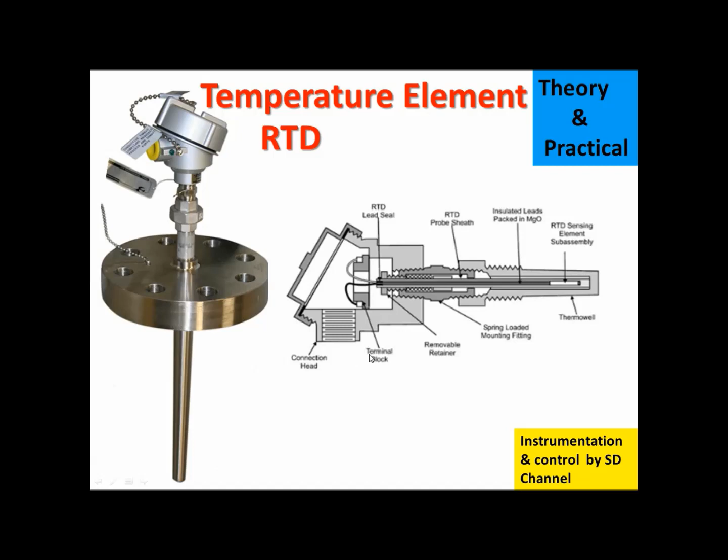So, what is the principle of RTD? RTD stands for resistance temperature detectors. It operates on the principle that the resistance of a metal changes with the temperature, means if the temperature increases, resistance will increase, and if the temperature decreases, resistance will decrease. So this is called positive temperature coefficient. RTD is a positive temperature coefficient.

So you can see here how a typical RTD looks in industry. So this is the element, and this is the terminal part. This is the cable gland, and this is the cross sectional view of the RTD. Here a RTD bulb is there, and this is a two-wire RTD. So two wires are shown here.

You can see if you give the temperature here, the resistance of the RTD bulb will increase, and that resistance is converted by the controller into the electrical signal, that is heat to resistance, resistance again to temperature.

So now the question is why platinum wire is used in RTD. You may know already that platinum wire is used for the RTD purpose. Why? Platinum has an excellent corrosion resistance. It can withstand chemicals and has excellent long-term stability. Over the period of time, it shows the perfect characteristic. So no deterioration will be found in the long term.

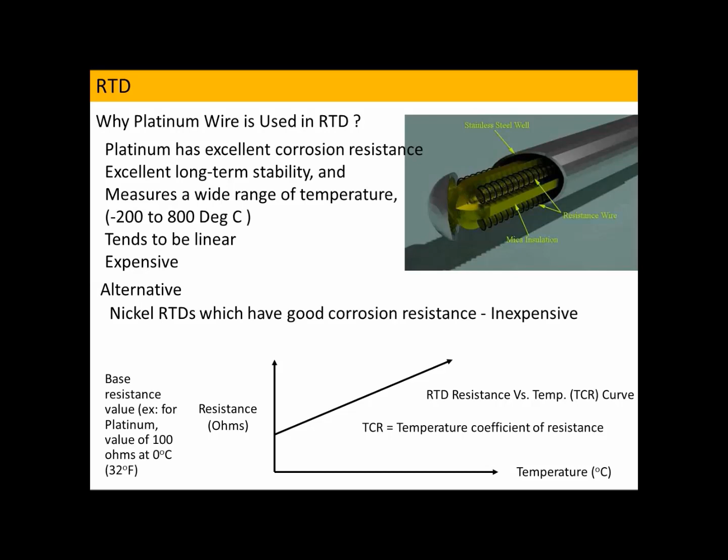Now you can see the loop of the RTD, how it is connected with the DCS. I have shown here the two possibilities how it is connected to the DCS. So this is your RTD. This is the terminal. You can see three wires are there. This is a three-wire RTD. One is white, the other two are red. These two red wires are internally connected.

So the resistance between these two lead wires will be less than 1 ohm, and you can see this white wire. This white wire is connected to the RTD resistance. So you will get some resistance according to the temperature in between the red and white. So this depends on the temperature.

So now this RTD is connected through this line. You follow this line, connected to the DCS directly. So the resistance is going to the DCS. Now there is another option. RTD can be connected to the temperature transmitter, and this temperature transmitter converts the resistance to 4 to 20 milliamps.

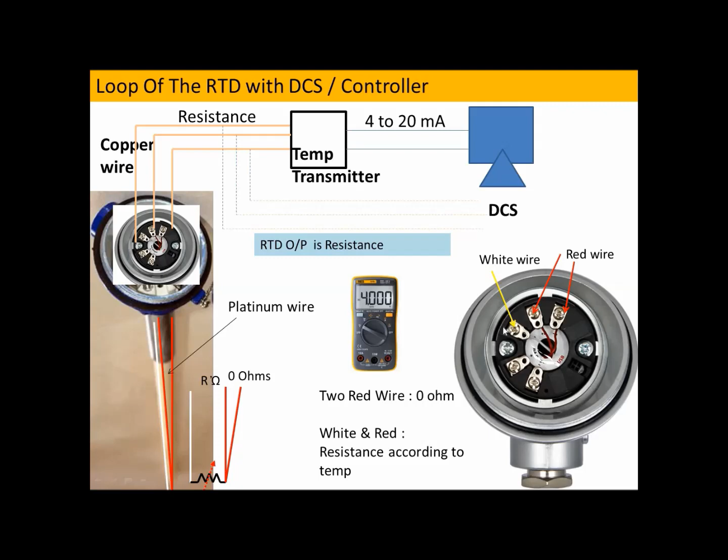So now what is PT100 and PT1000? These are the two types of RTD generally used in industry. One is PT100. PT100 means at 0 degree C temperature, the RTD will give you 100 ohms resistance. And PT1000 means at 0 degree C, the RTD will give you 1000 ohms.

So around 10 times. Now see, for both PT100 and PT1000 sensors, linearity of the characteristic curve, operating temperature range, and response time are all the same. The temperature coefficient of the RTD is also the same for both PT100 and PT1000.

But the difference is that suppose for PT100 the measurement error is plus 1 degree C. For the PT1000 it will become 0.1 degree C. This was 1 degree C, this is 0.1 degree C, because PT1000 is 10 times more than PT100, higher by the factor. So this will reduce the error by 10. So the PT1000 is more accurate than the PT100.

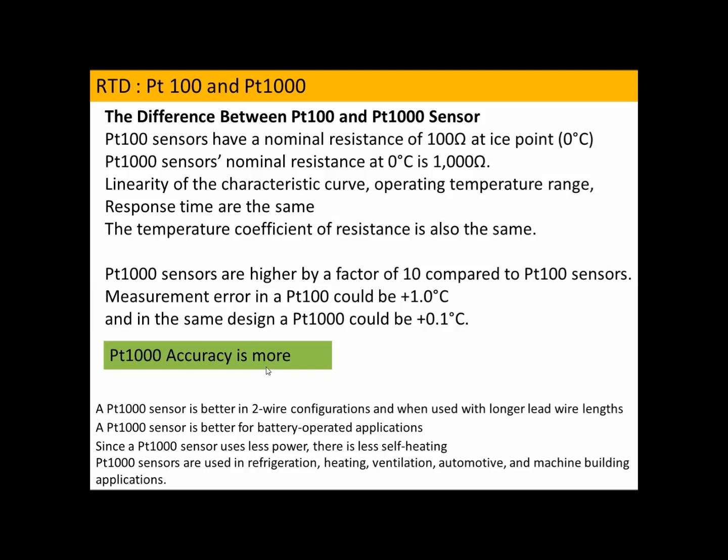So now, what is the temperature coefficient of resistance? To convert the resistance into temperature, there is a formula. For that, you have to know what the temperature coefficient of resistance is. That is denoted by alpha. Alpha is equal to resistance at 100 degree C minus resistance at 0 degree C. For PT100, resistance at 0 degree C is 100 ohms. And divide by resistance at 0 degree C, that is 100 ohms, into 100. So this is the formula.

Now you can see there are two types of temperature coefficient. One is the older US standard, that is 0.00392, and the newer European standard, that is 0.00385. In our industry practice, we usually use the temperature coefficient 0.00385. Both are applicable for PT100 and PT1000. Same.

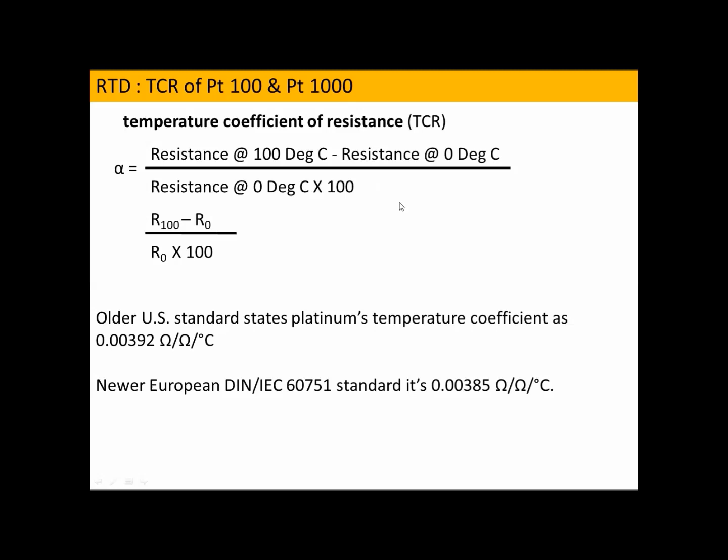So for RTD, I'll show you the lead wire effect. Now consider this is a two-wire RTD. Ignore this resistance now. This is connected directly to the RTD, and the resistance of the RTD you get is 177 ohms. Now we will calculate the temperature for 177 ohms. I have shown you the formula. R, 177 ohms, divided by resistance at 0 degree C, that is 100 for PT100, minus 1, divided by temperature coefficient 0.00385, that will be 200 degree C. So for 177 ohms, the temperature is 200 degree C.

Now consider due to the length of the RTD lead, this lead resistance is increased by 5 ohms, and the resistance of this lead is also 5 ohms. So now these 5 ohms, these 177 ohms, and these 5 ohms are all in series. So the equivalent resistance of the RTD will be 177 plus 5 plus 5, that is 187, divided by resistance at 0 degree C, that is 100 ohms, minus 1, divided by alpha, the temperature coefficient 0.00385, that will be 225.974. So the actual temperature is 200 degree C, but due to the lead wire, it is showing 225.974 degree C. So 25.974 degrees more. This is an error. This is called the lead wire effect.

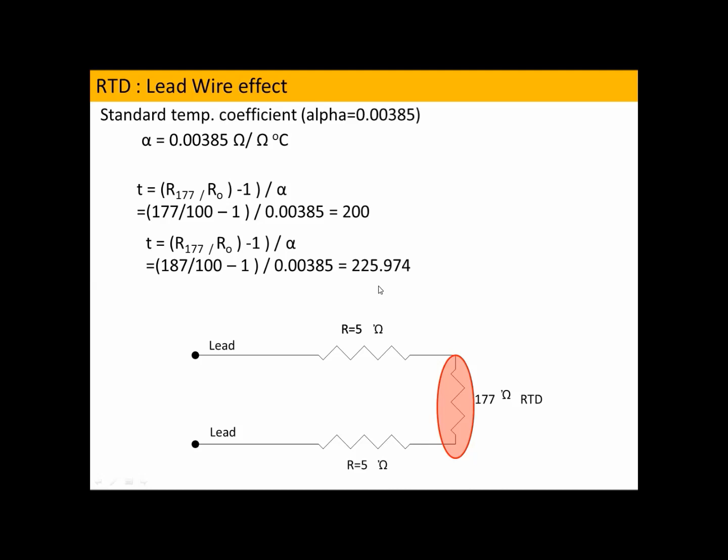So according to leads, there are mainly three types of RTD: two-wire, three-wire, and four-wire RTD. Two-wire RTD has no lead wire compensation; it's directly connected to the RTD. For three-wire RTD, there are three leads: two main leads, and the third lead is for compensation. For four-wire RTD, there are two main leads and these are the compensation leads. So four-wire is more accurate because each lead has one compensation lead. So this is more accurate.

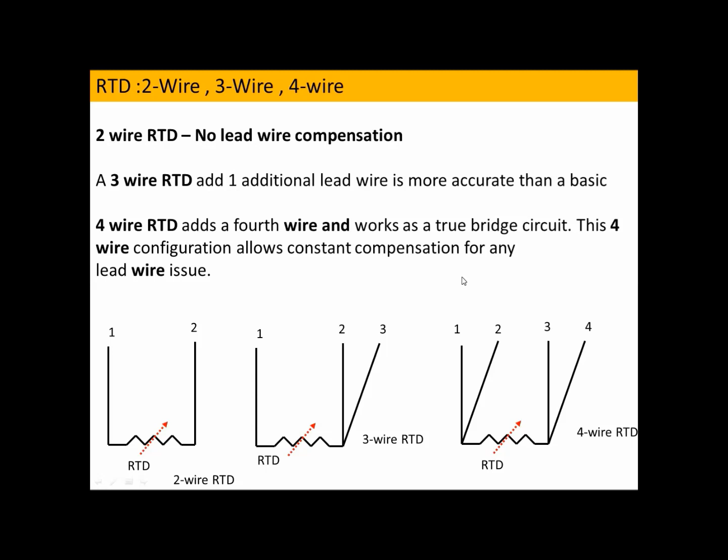So identification: how you can identify the RTD leads. These are the main leads, for example 1 and 3, 2 and 3 also. You will get resistance between 1 and 3, 2 and 3, or 2 and 4 around 107 to 110 ohms, because our ambient temperature is around 30 to 37 degrees C. Due to this, the resistance will be 107 to 110 ohms between 1 to 3, 2 to 3, 2 to 4, and 3 to 1. And the resistance between 1 and 2 and between 3 and 4 will be less than 1 ohm. So this way you can identify the leads.

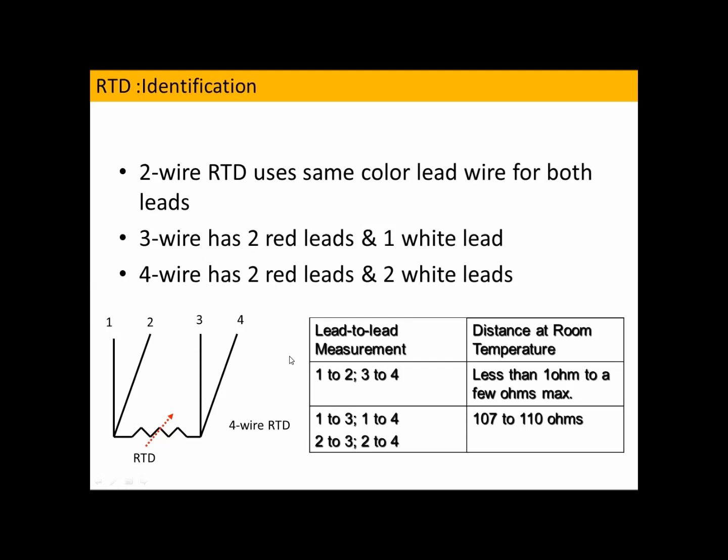So this is the Wheatstone bridge circuit. Now I will show you how the controller converts this RTD resistance to an electrical signal. In a bridge circuit, you know that four arms are connected in a bridge, basically for resistance. Rx is the unknown resistance, R2 is the variable resistance, and then R1 and R3. Rx and R3, this is called the ratio arm. R2 and R1, this is called the ratio arm. And one galvanometer is connected between D and B, and this is the bias voltage.

So when the bridge is in balance condition, current will flow like this, here to here to here, and current will flow like this. It will not flow between D and B, because the potential difference between D and B is zero. If there is no potential difference, current cannot flow through that path. So current will not flow.

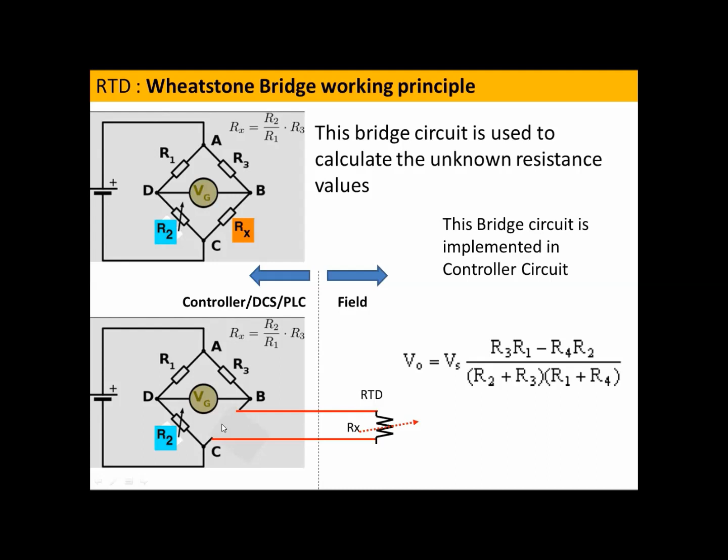So what is the Wheatstone bridge principle for the case of three-wire RTD? The three-wire RTD is connected here. You can see one arm is connected here, another arm is connected here, and the compensation lead is connected to this. Now if the resistance of the lead wire increases due to the length, and this also increases due to the length, the resultant will be cancelled out, because these leads are connected in different arms. So this will be eliminated.

This lead wire effect will be eliminated, and this compensation lead is connected here, so it will compensate if the lead wire resistance is increased, but there is a problem for this lead. That is eliminated in the case of 4-wire RTD. In the 4-wire RTD, one arm is here, another arm is here, and the lead wire is connected here, and another lead wire is connected in the opposite direction. So these cancel out each other. This is the advantage of 4-wire RTD.

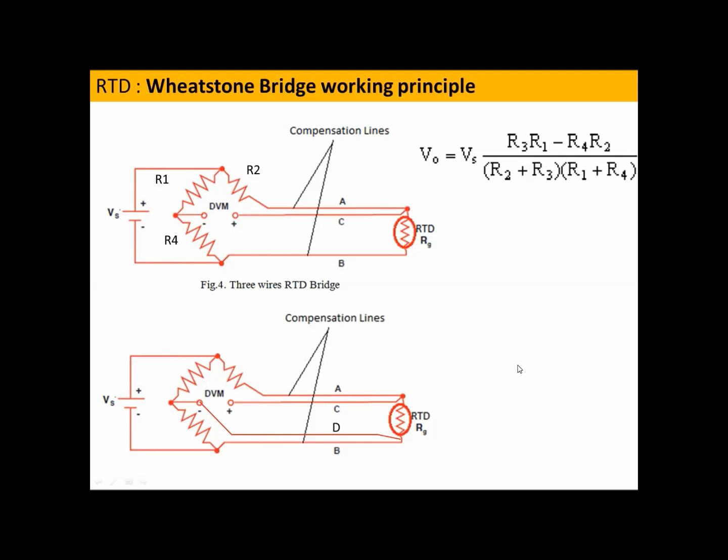Now, how to calibrate the RTD or thermocouple. The same procedure. You can see one RTD is inserted inside the temperature bath. A temperature bath has an internal temperature element, that can be a thermocouple, connected to the temperature monitor or controller, and this RTD is also connected. Now if you change the set point to 100 degrees C, the temperature will increase to 100 degrees C, and your RTD will show 100, 100.2, 100.1 degrees C, like that. If there is no difference between these two temperatures, your RTD is okay.

If there is a large difference between this temperature element and this, there is a problem. You have to change the RTD. The same procedure applies for the thermocouple also. Okay, this is a temperature bath basically.

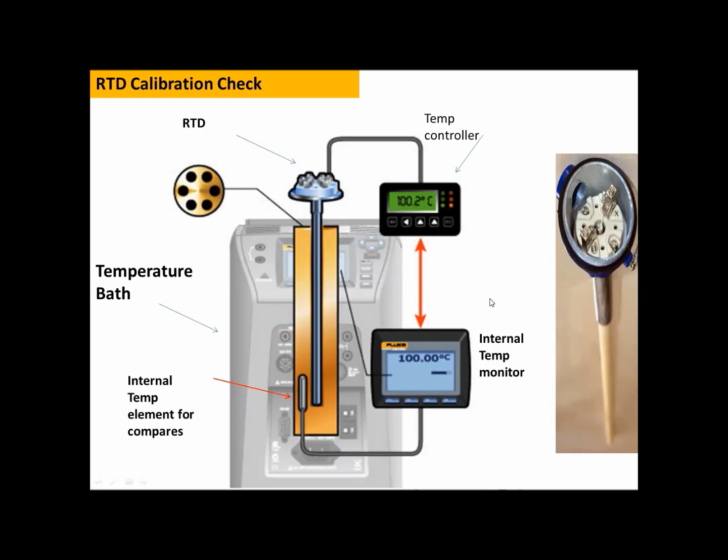So now what is a thermowell? It is a cylindrical fitting used to protect the temperature sensor from the industrial process. Your RTD is inserted inside a thermowell, and the thermowell is connected to the process line by this flange. This is a hollow pipe, with the RTD inside the thermowell. So it protects your RTD from the vessel temperature, pressure, all those things.

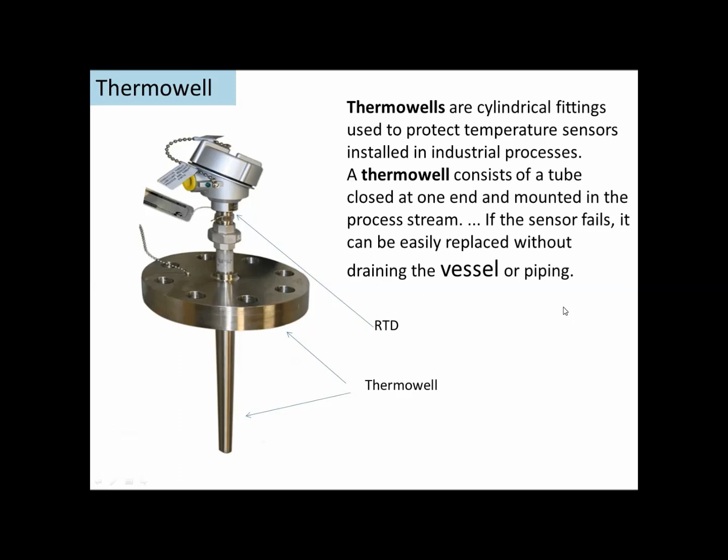So what are the advantages, or comparison, of RTD versus thermocouple? Advantages of RTD are better stability, better repeatability, and a high accuracy level. Disadvantages of RTD are that platinum costs around two times more than the thermocouple, and the temperature range is limited. In industry, we use RTD for around 400 degrees C. Another important feature is that RTD response time is slow, 2 to 4 times slower than the thermocouple. So if your process does not permit the slower response, you have to install a thermocouple.

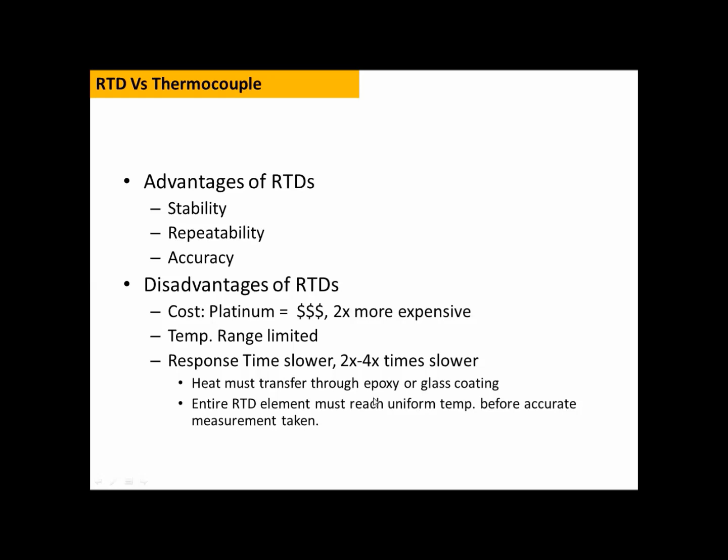So now you will see how to configure the temperature transmitter for RTD and thermocouple using HART. So these are two types of temperature transmitter. Rosemount 248. You can see the terminal details.

These 2 and 3 for thermocouple, plus minus indicated, and this 1 2 3 4 for RTD connection, 4-wire connection, or you can connect 3-wire, 2 3 4, or you can connect 4-wire, 1 2 3 4. 2 3 for main resistance, and 1 4 for your compensating lead. And this is the plus minus output of the temperature transmitter.

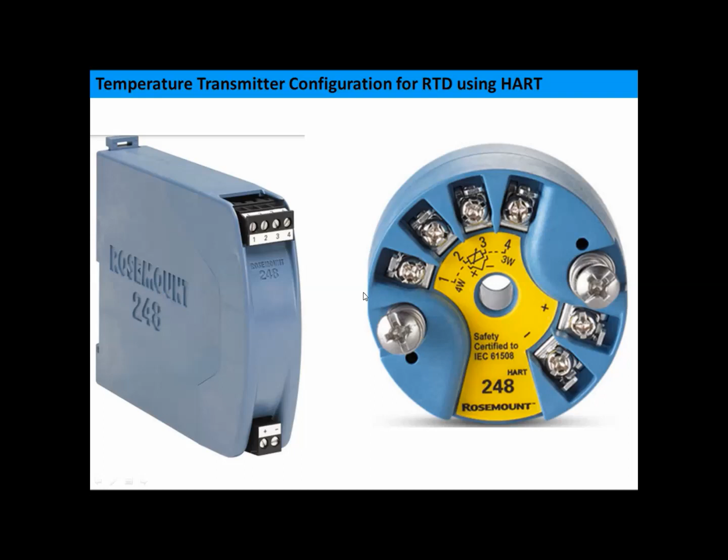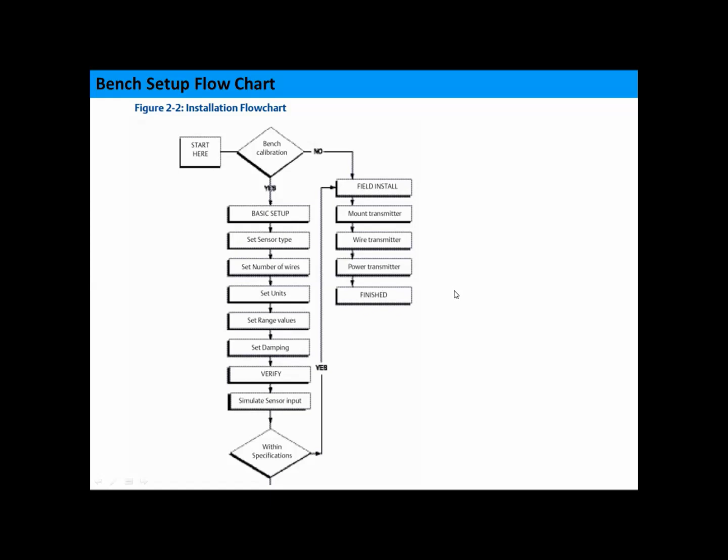So after that, verify if simulation sensor input is okay, then you are ready for field: install and mount transmitter, wire transmitter, power transmitter, and finish. So these are the basic steps. Now see. So this is the HART menu tree, how you can enter from home menu to any menu to configure. So I will show you step by step.

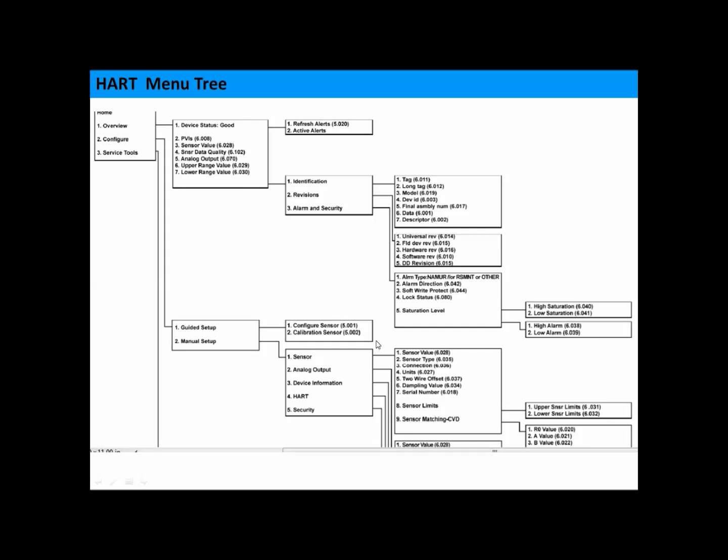So first of all, you should know about the parameters. Basic parameters need to set for RTD or thermocouple. See, first, what is the sensor type? You have to understand. The sensor type is RTD or maybe thermocouple. You can enter into sensor type by configure, guided setup. Then sensor type will come and you have to select RTD or thermocouple.

If thermocouple, then K type, J type, S type, you have to select thermocouple type. Then if RTD, then you have to select PT100, PT1000, like that. After that, you have to select 2-wire, 3-wire or 4-wire. So then the important thing is unit. Unit is degree C, degree Fahrenheit or Kelvin, anything.

Then the PV configuration. PV configuration is nothing but you have to set the LRV and URV. So you have to set the LRV value, URV value. This is the range of the transmitter. LRV may be 0, URV may be 200 degrees C, 300 degrees C, depends on your criteria.

So this is the offset. In case of 2-wire RTD, there is no lead compensation. So then you have to put the lead resistance manually. If the lead resistance is suppose 1 ohm, you get 1 ohm by measuring with the multimeter, then you have to put minus 1 ohm.

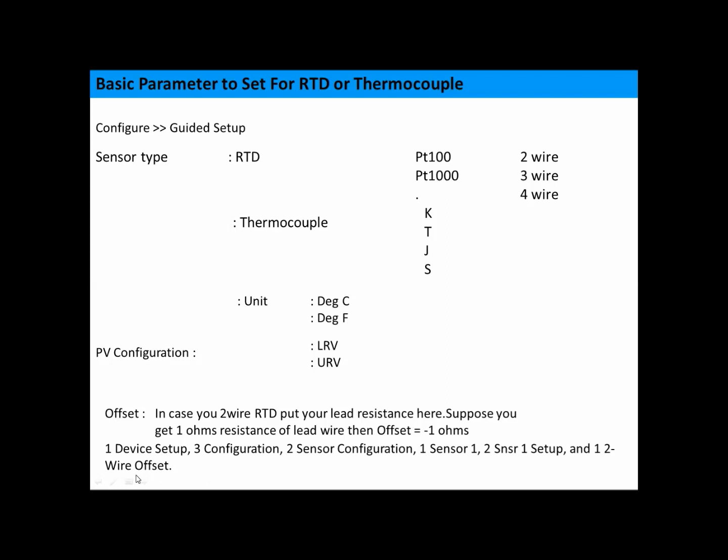It will compensate manually. So for offset, you have to go through device setup, configuration, sensor configuration, sensor setup, wire offset, right? Then the basic parameter to set for RTD or thermocouple, that is sensor trim.

If you see, the transmitter has two basic parts. One is sensor input goes to the AD converter, that is analog to digital converter. It converts the analog signal to digital. Here input trim is done. Then this signal is going to the DA, means digital to analog conversion, and it ultimately goes to the 4 to 20 milliamps. And here the output trim is done to adjust the 4 to 20 milliamps.

And to adjust the sensor input, you have to do the input trim. This is the difference between input trim and output trim. To go to the input trim, output trim, you have to go through device setup, diagnostic service, calibration, sensor trim, sensor input trim. This is the path you can go.

So to do the sensor trim, expose the sensor to a known temperature. Suppose in a temperature bath you have put the temperature element and allowed the temperature to be stabilized. After stabilization, if your temperature is stabilized to the known temperature source and there is a deviation, you can do the input trim there. Suppose your input sensor is showing 200 degrees C, but it should be 210 degrees. Then you have to do the sensor input trim. Okay.

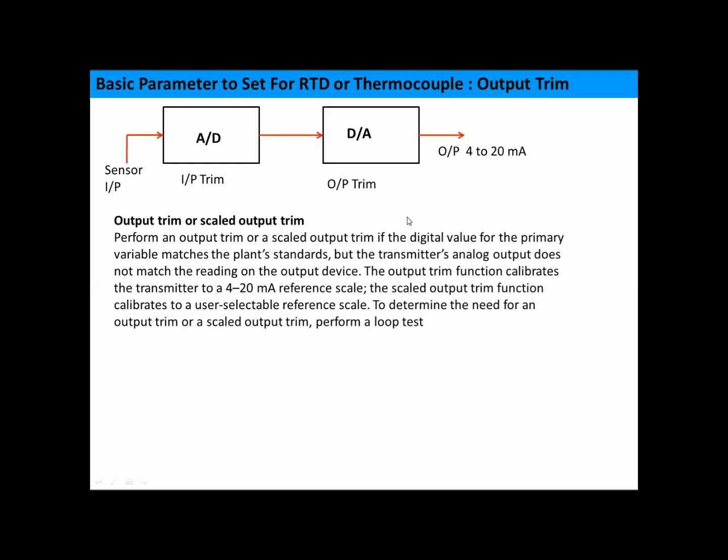So what is the loop test? The loop test is to check the loop whether it is okay or not. From HART protocol, you can select 4 to 20 milliamps. If you give the milliamps, it should show in your controller or DCS the maximum scale according to 20 milliamps, or minimum scale according to 4 milliamps. 4 milliamps means it should show 0 degrees, and 20 milliamps means it should show 200 degrees maximum range. So in this way you can do the loop test.

So for loop test: Device setup, Diagnostics and service, Test device, Loop test. Before finalizing your transmitter, you have to do the loop test. This is mandatory.

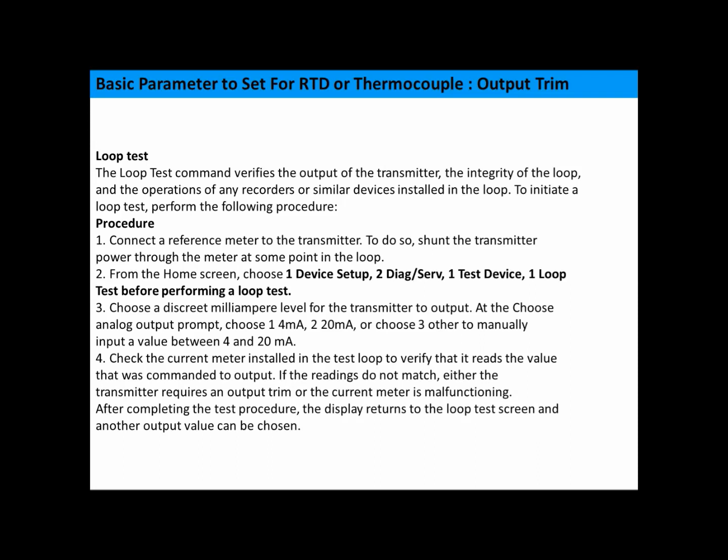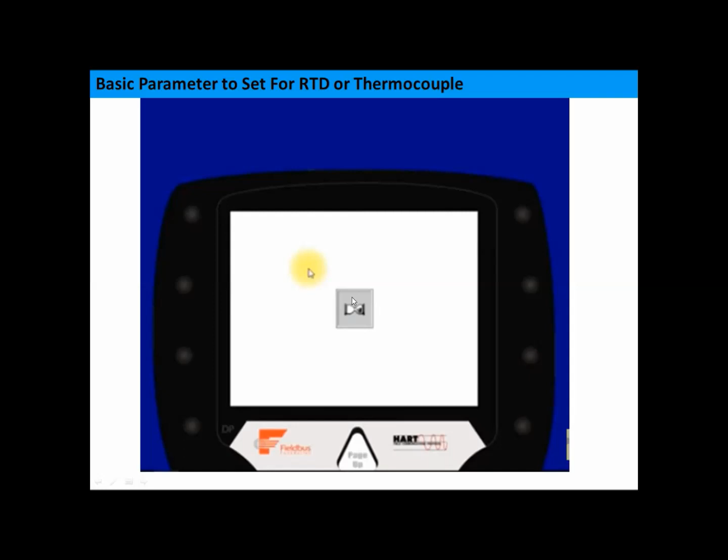So now, for the Field Communicator 475, you have to press the power on key first. This is the power on key. Then it will come to the home screen. It will show the HART application. You have to click on the HART application. Then it will go to this screen, and now it will show process variable, diagnostic or service, basic setup, detailed setup, and review.

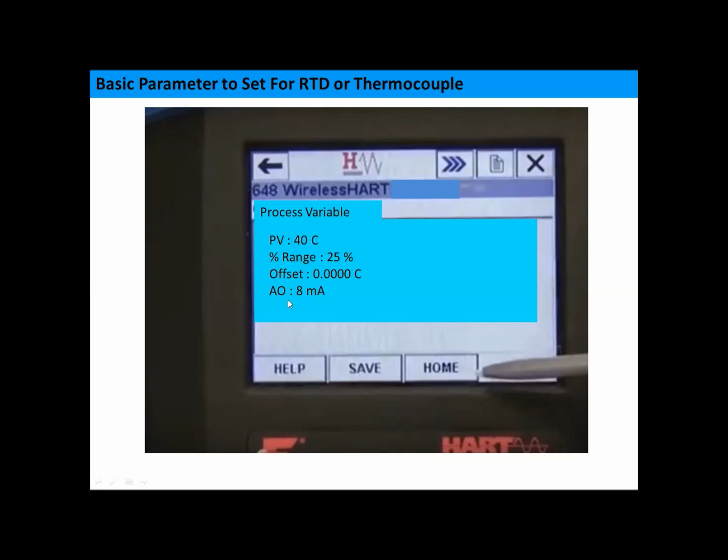Process variable means what value it is now showing, what temperature it is now showing, or what the milliamps output is. All those things you can see in the process variable if you click here. So now the process variable is showing 40 degrees C, range in percentage is 25%, and offset is given 0 degrees C. Analog output according to 40 degrees C is 8 milliamps. So now again you go back to the previous screen.

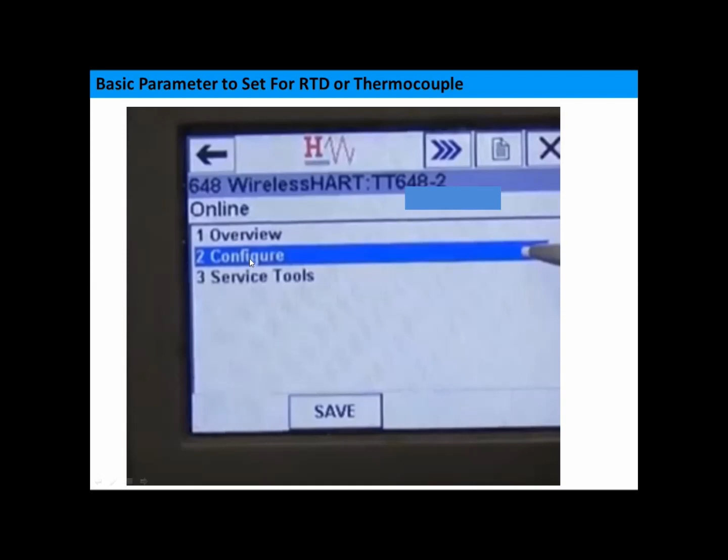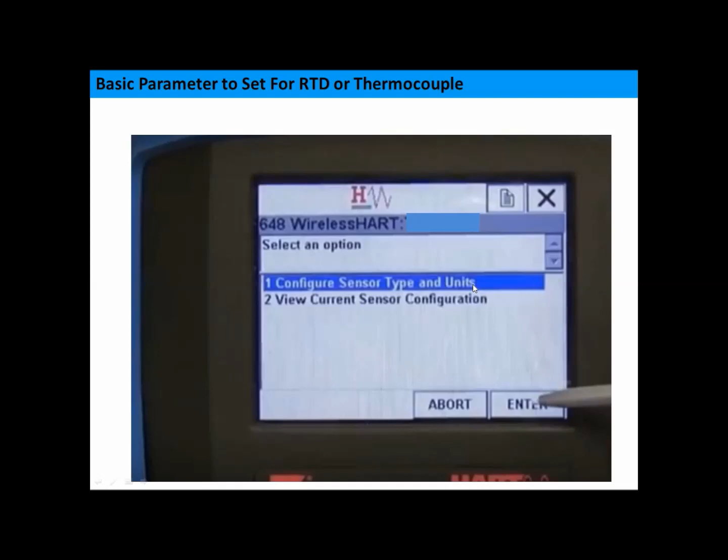Now we will do the basic setup. Click on the basic setup. Then configuration will come. Click on configuration. Then you click on the guided setup. Then you click on configure sensor. Then you click on configure sensor type and unit. You have to put the sensor type here and unit here. So you can choose your PT100 or thermocouple etc. from this list and press the enter button.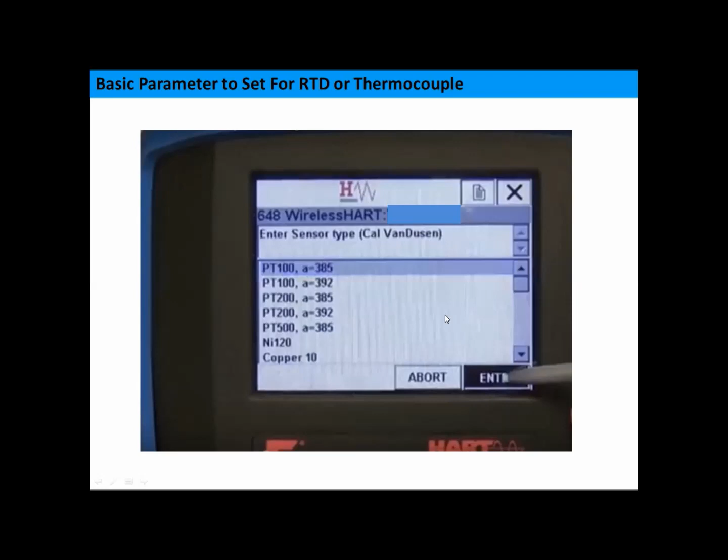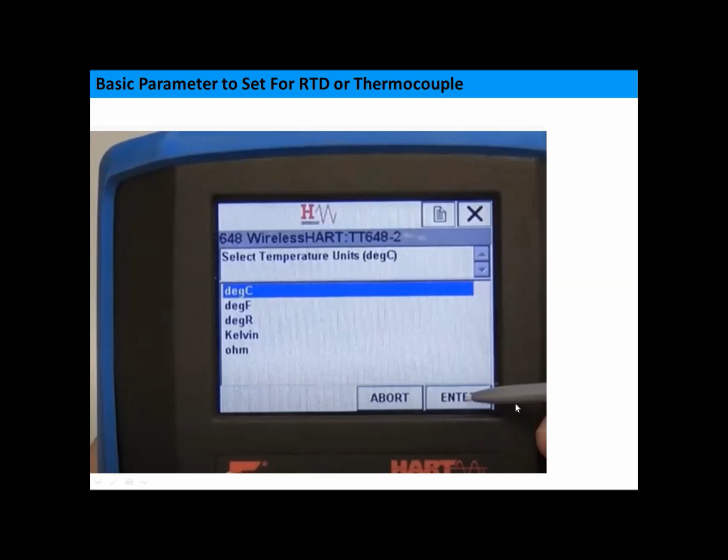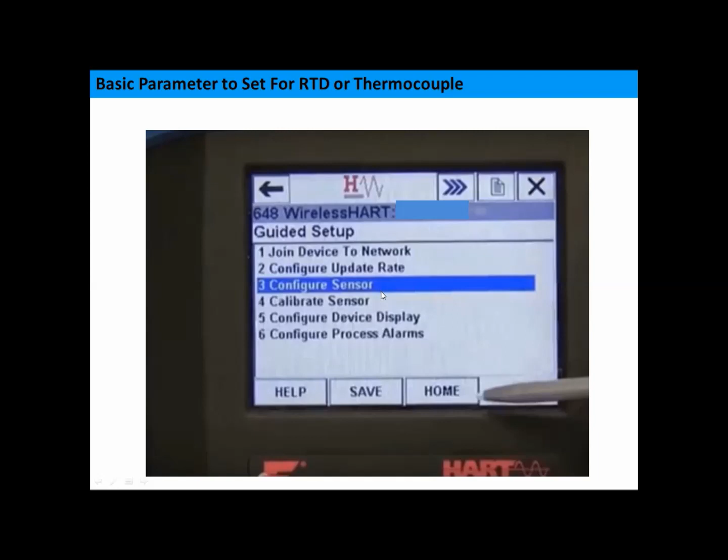So now if you choose RTD, then you have to give 2-wire, 3-wire or 4-wire. You select 3-wire, for example, enter. Now the unit. You have to give the unit, degree C, degree Fahrenheit, Kelvin, etc. Enter. Now go back to the previous screen, and now configure sensor. You have to click configure the sensor. So it will show sensor class RTD, sensor type PT100, unit degree C.

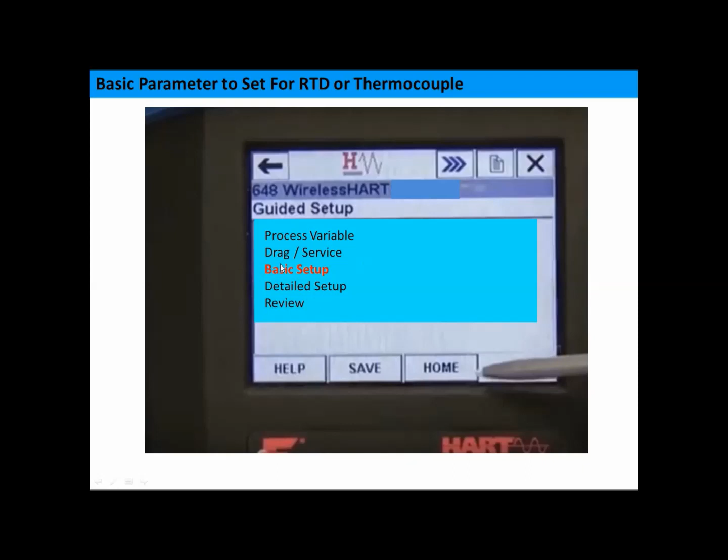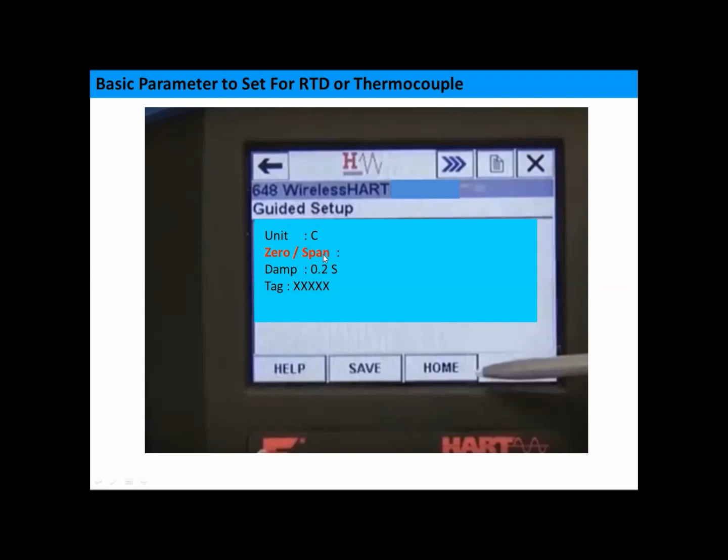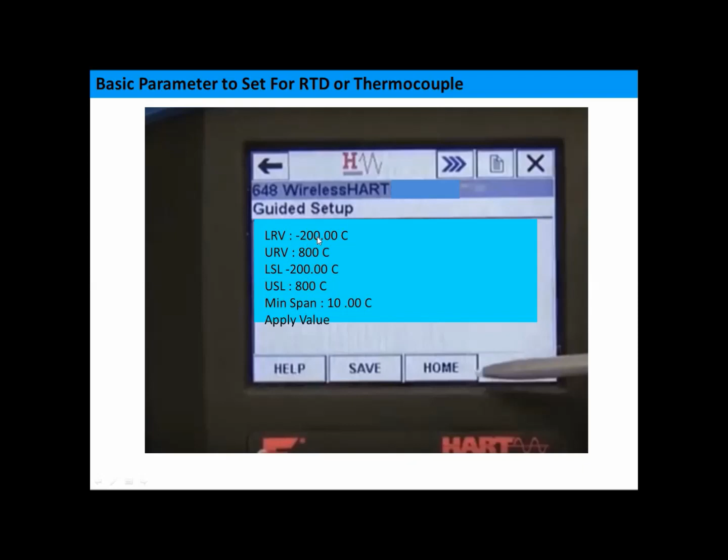Again go to the basic setup. This is the basic setup. Now PV configuration. This is for selecting the range of the transmitter. So it will come zero and span. You have to give the zero and span, means LRV and URV. So suppose LRV is already minus 200 degrees, and URV is 800 degrees C, for example. If you want to change LRV or URV, you click on this button. Then it will come like this.

LRV is now minus 200 degrees C. If you want to change this, just click on it and type the value. For example, you can put 0 here. So it will take 0. Then press OK. So LRV you have set. This way you can set the URV value also, the same way.

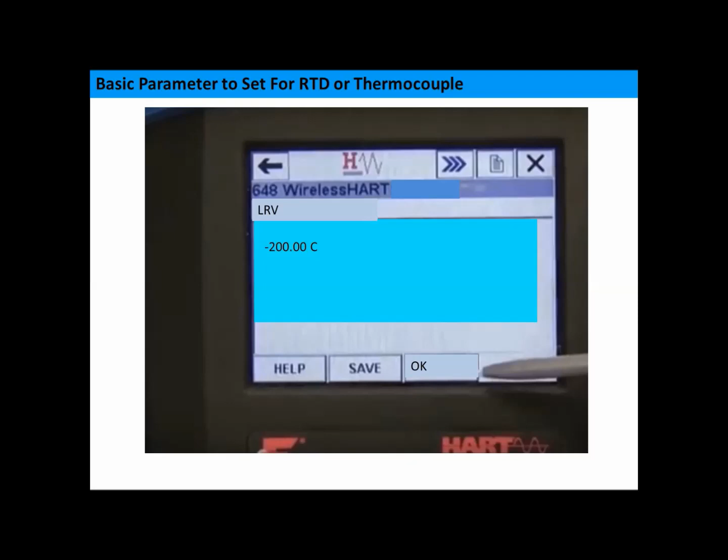So thank you very much for watching the video. Through this video, you can learn what the RTD is, what the principle of RTD is, and how to configure the temperature transmitter. Thank you very much.